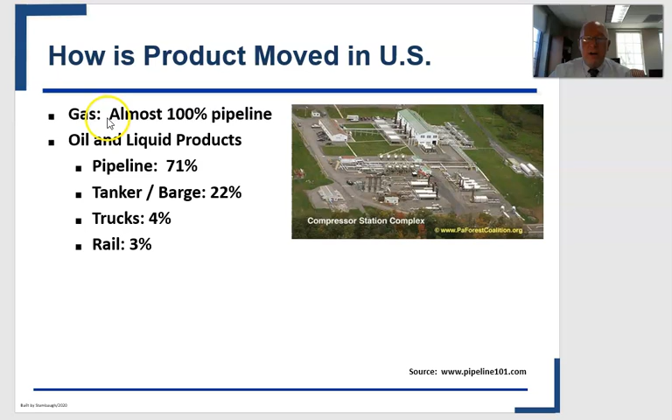So now let's talk about the material for the exam. For the midstream issue, conceptually it's important that you understand the difference between gas and oil. We talk about how the product primarily moves, and again you see a difference between gas, oil, and other liquid products.

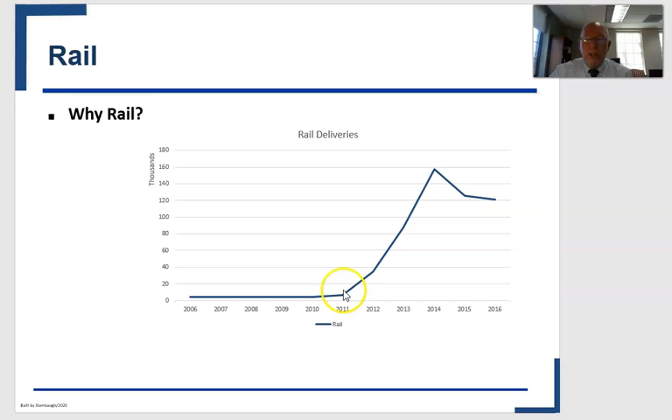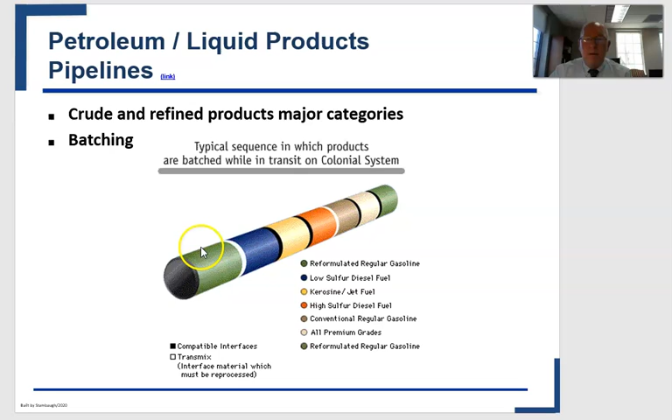Make sure that you recall why rail increased so much in this time frame, and also why rail doesn't tend to be popular over time. The concept of batching is useful to understand.

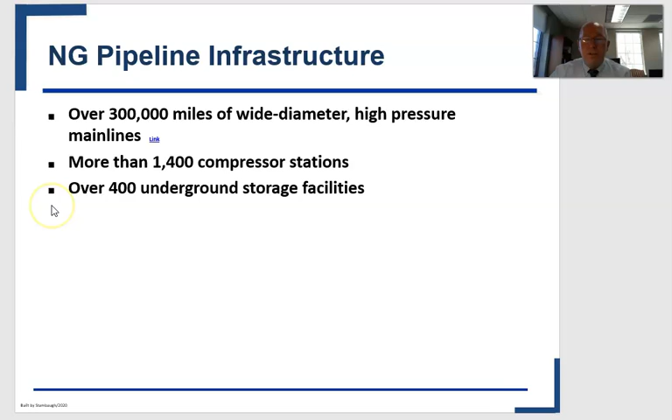As far as pipelines go, nothing specifically about the mileage, distance, or anything like that, but understand that there is a greater variance in demand for natural gas than for oil, and because of that you have to have storage solutions. No specific questions about any of the companies, but then how it can affect profitability.

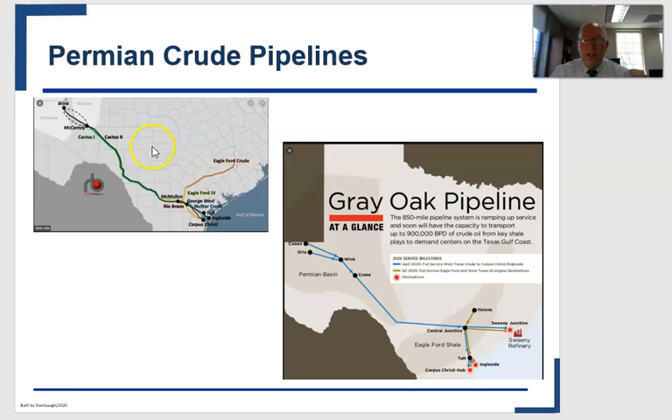This is an important discussion to recall: what happened in the Permian Basin and the price differentials, and why that happened, and then why it changed. Again, you should recall that from the presentation. Go back and watch the video on that.

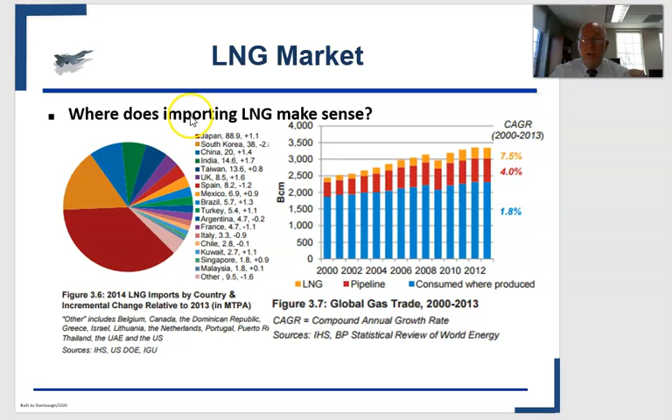As far as LNG goes, when does exporting it make sense? When does importing it make sense? What are the countries that import quite a bit of LNG? Remember that the liquefaction process and building the facilities—they're called trains to do the liquefaction process—is by far the most expensive part of it.

And then, even though they prefer to deal on long-term contracts, the market has forced them to shift to more spot contracts, which is problematic because the liquefaction cost is so high.

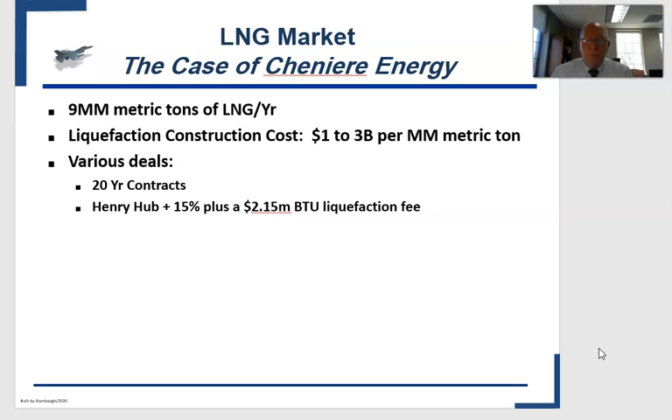That's it for the midstream section. We'll get into the downstream section next. On to the downstream industry.

Remember that the downstream industry is primarily concerned with oil products because natural gas products go directly to the market. Remember that the downstream industry is the purchaser of the crude, and then they turn it into refined products. You'll definitely want to know what the crack spread is. And because they are the purchasers of the crude, they do have an impact on profitability.

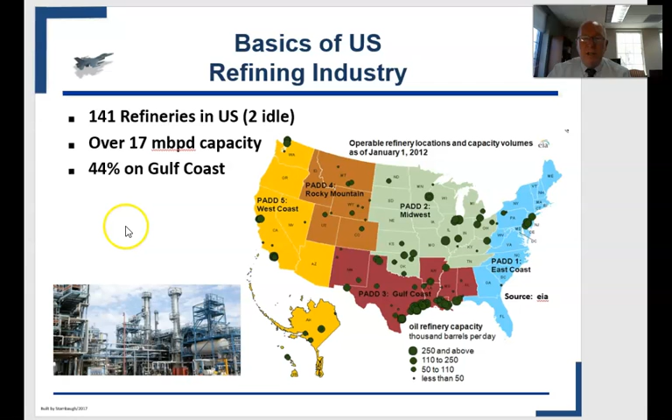As far as the refining process goes, I want you to remember that the Gulf Coast of the United States is where, like it says, 44% of the refineries are located. Remember this is a distillation tower—these are probably the single most distinguishing trait of a refinery, and there'll be some questions about that.

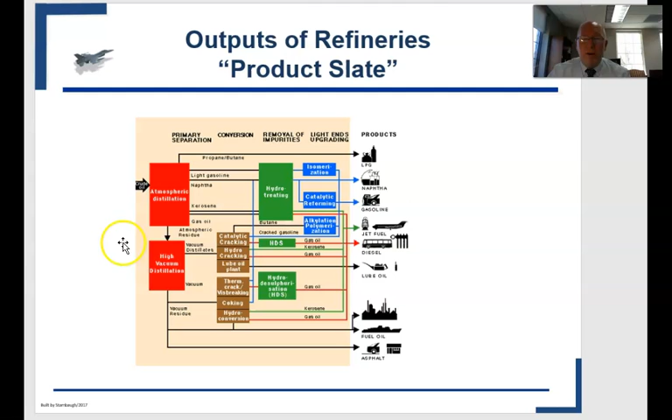No questions about who owns what or how the refiners are concentrated. Understand the product slate, what comes out, the major processes involved in coming out, and very importantly, understand that all refineries, because they don't have equal amounts of all these processes, aren't equal, and all crude is not equal either.

So I would be very much up on this concept and be ready to tell me, for example, what type of crude gives a higher cut of gasoline, what type of crude gives a higher cut of middle distillates, things like that.

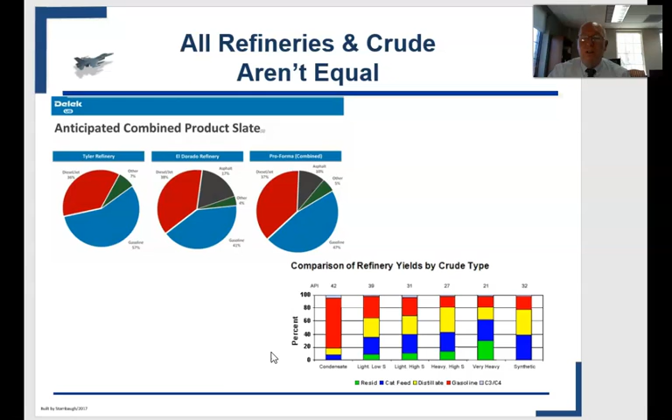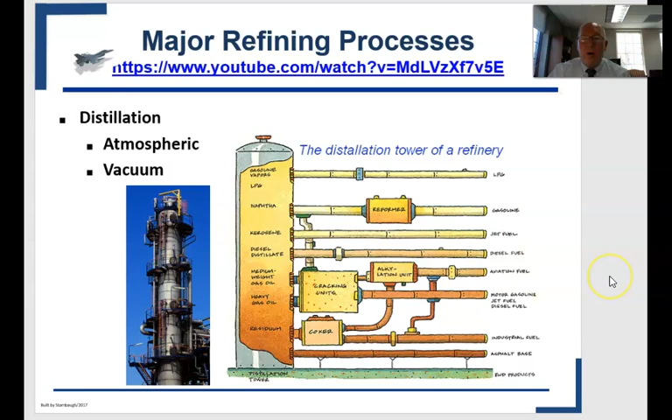We talked in class about the physics of the distillation tower. I would be well up on that and how it works in terms of temperature and what products tend to come out where. Nothing about cracking,

nor about these other processes—let's see, I eliminated the question that talks about that. And so that's it for downstream.

As far as the regulatory segment goes, I'm not going to go over those slides because the major thing I want you to recall is what processes are largely driven by federal regulation, and what processes are largely driven by state-based regulations. Also, we spent our time in class talking about the changes to the methane regulations made by the EPA in the summer of 2020. There is a multiple choice question about it and also a short essay question about those changes. So make sure that you go back and review those documents and recall our discussion on that topic.

Okay, let's talk about the last segment, the refining. Well, I just said refining, and what I really meant was renewables and the idea of decarbonizing the economy.

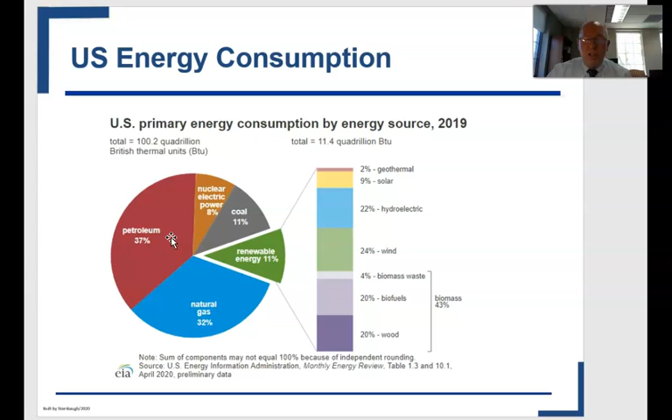These are good questions to keep in mind because they may help you answer one of the short essay questions. Remember that in the United States, we got 80% of our energy from fossil-based fuels, and worldwide it's about 85%. So this idea of decarbonizing the economy, decarbonizing our energy consumption, is going to be challenging just because it's such a huge component to it now.

As far as solar goes, make sure that you understand the cost trends in solar and why. The concept of net metering - there is a short answer question about that, so make sure that you understand net metering.

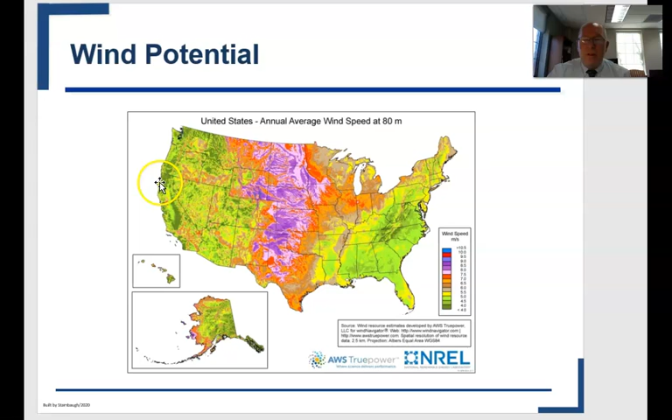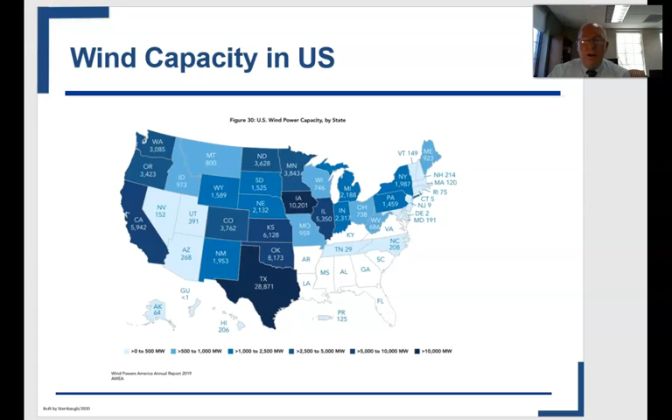This is just a handy thing to know about where the wind potential is. You don't need to be able to tell me about the physics of how wind is produced or those particulars - no particular question off of this, but it's kind of nice to understand. The idea of what states have a lot of wind and why they have a lot of wind generation capacity built in those states - we had a long discussion off of this slide in the video. Make sure that you're up on that.

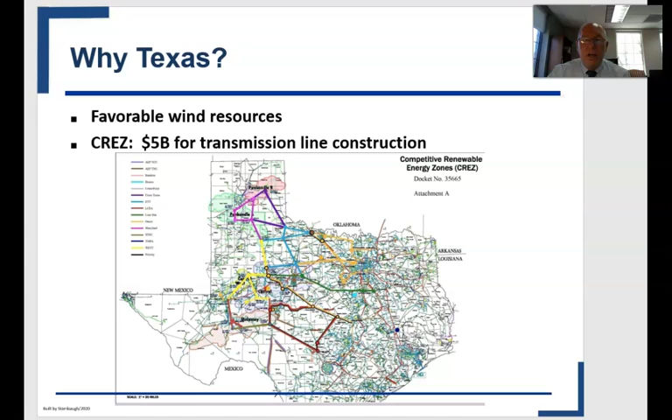We talked about what it costs to do this and the various elements, and this ROT stands for rule of thumb that you could use to develop the cost. So I'll let you know right up front, I'm going to give you a situation where I say there's this many wind turbines in a wind farm, and this is the type of turbines that were used to build it - when I say type, I mean how many megawatts. What was an approximate construction cost for that wind farm? So be ready for that.

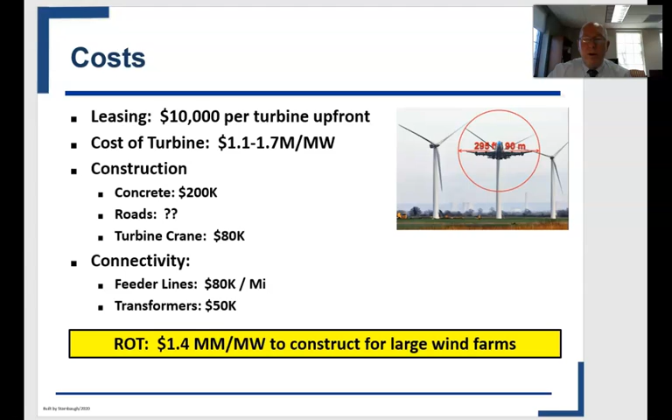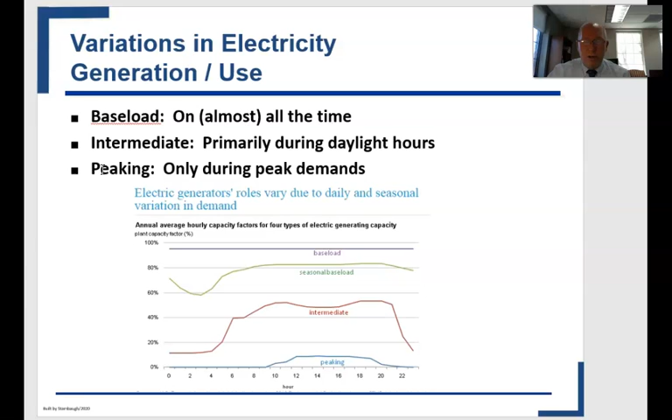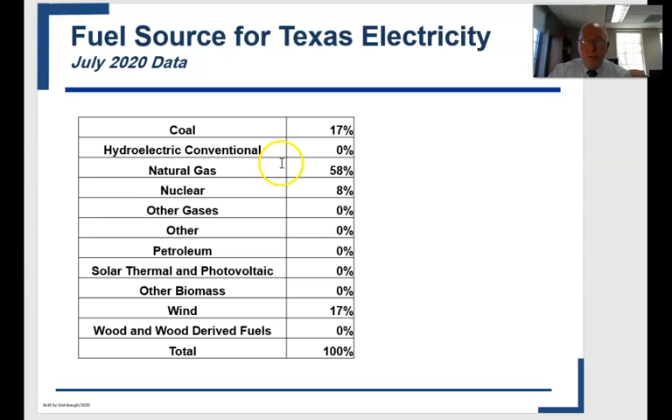Then a good discussion on how electricity use varies during the day, and very importantly, the different types of sources that have traditionally been used to meet those energy demands. This is a good starting point to remember, not because there's a question, but because it will help you provide some of the answers to some of the short essay questions.

Then in class, we got into the decarbonization. We talked about the issue of power density, and you're going to want to remember that. These slides are very helpful - be familiar with the different types.

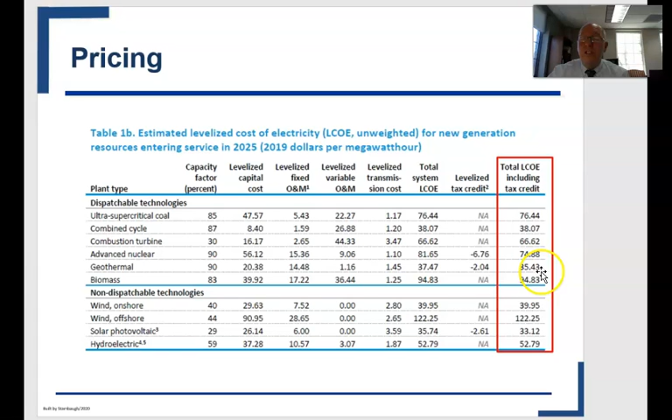Again, we're primarily concerned with combined cycle, which is the new type of natural gas, and then also concerned about nuclear, and then wind, mainly onshore wind, and solar photovoltaic. So I'd be familiar with each of these columns, but the red box is the most important comparison, where it's equating these technologies to each other and what their costs look like.

We also had a good conversation about the subsidies, so I would be familiar with the overall chart, and then the red boxes are also going to lead you into some specific test questions.

Talked about, surprisingly, the CO2 emissions that are required to build an electric vehicle, and the fact that if you're using a coal-fired source, you can actually put out more carbon per mile driven, even without considering the construction-based emissions, than you would using a conventional internal combustion engine.

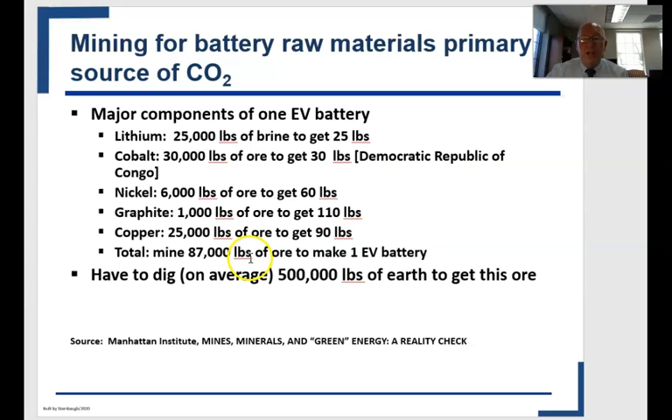But we talked about in class what happens when you start putting natural gas and even more so wind, solar, and nuclear into the mix, and what happens. So be familiar with this, and also with this - no specific questions here.

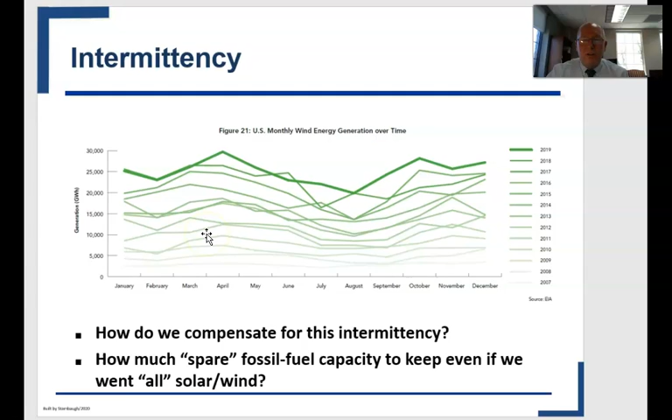A couple of questions about intermittency, so make sure that you're up on that and what it takes to handle that. And don't be surprised if I just ask for your opinion about where things are headed and ask you to make some specific comments toward where you think things are headed.